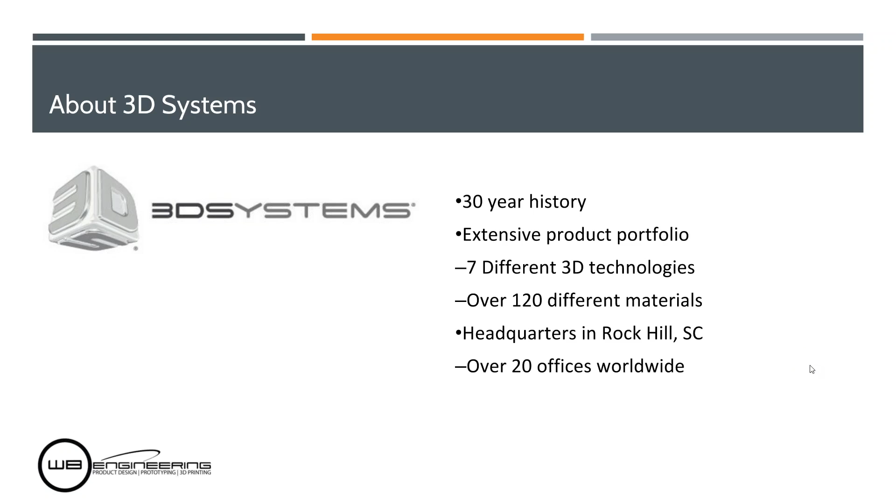So we're going to look into right now where 3D printing is currently being used. Across the board, 3D printing has been used in a lot of different industries - industrial products, one of the biggest markets, consumer products, automotive, medical, aerospace, academics, government, and then we have a small percentage for others and architecture.

So 3D printing is starting to become a standard tool for companies, specifically in the industrial products and consumer product realm. It's also starting to become a standardized tool in automotive, medical, and aerospace. 3D printing is now getting to the point where if you're not currently using it and you're in one of these key markets, you could start falling behind the curve.

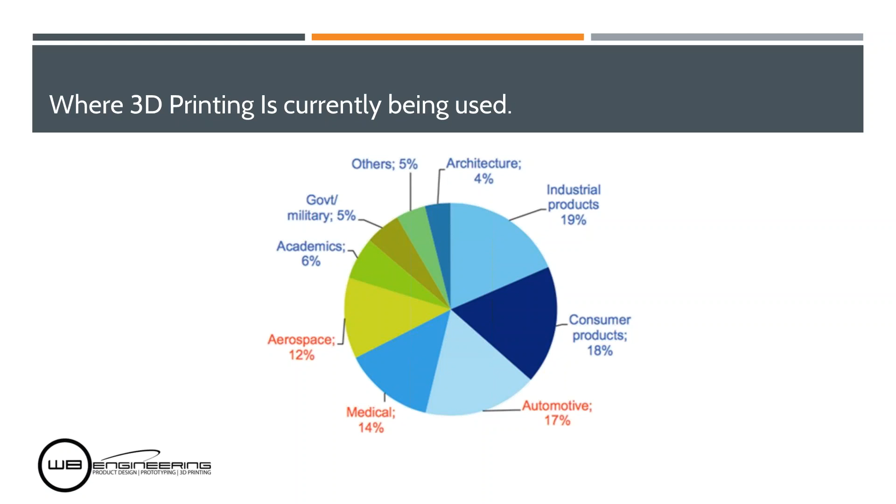We have customers in all different industries, and we have noticed that the market leaders do actively employ 3D printing as a part of their regular day-to-day activity. We've also noticed, as a partner of 3D Systems, a big increase in interest in terms of budgeting and actually implementing 3D printing over the last 3 years or so.

Okay, so let's go into some specific examples of 3D printing. One of the biggest areas where we've seen a huge boom in 3D printing is aerospace and also engineering optimization. Why? Because currently 3D printing is something that you can use to create really complex, optimized geometry without adding cost to your design.

This is a good example - it's a company called Frustum Inc. They actually did a direct metal printed part that was able to cut 70% of the weight of the original product while maintaining the same mechanical strength.

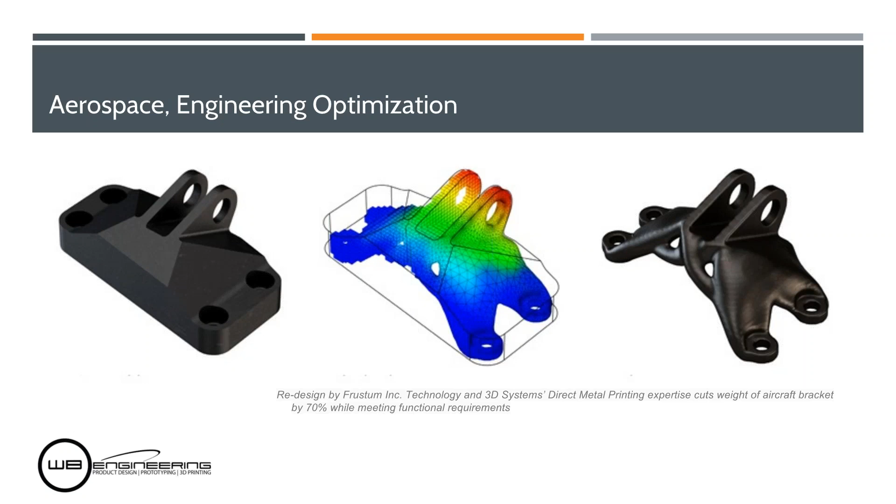In aerospace, this is a very important factor: being able to get a part that is just as functional but reduces weight by 70%. I was at a client's place a few weeks ago, and this is exactly what they were looking at 3D printing for. They designed something that has to carry a certain payload, which they lease or sell to their customers. So if their device is a quarter of the weight, that means they have that extra weight to sell to the customer. That's one of the big markets.

The other market is medical devices. This is an example of someone at Microdent, the founder of the company. He says even several years ago, metal 3D printing was good in terms of productivity, quality, and economics. He's pointing toward the future, saying this is something that is going to be a must in medical devices.

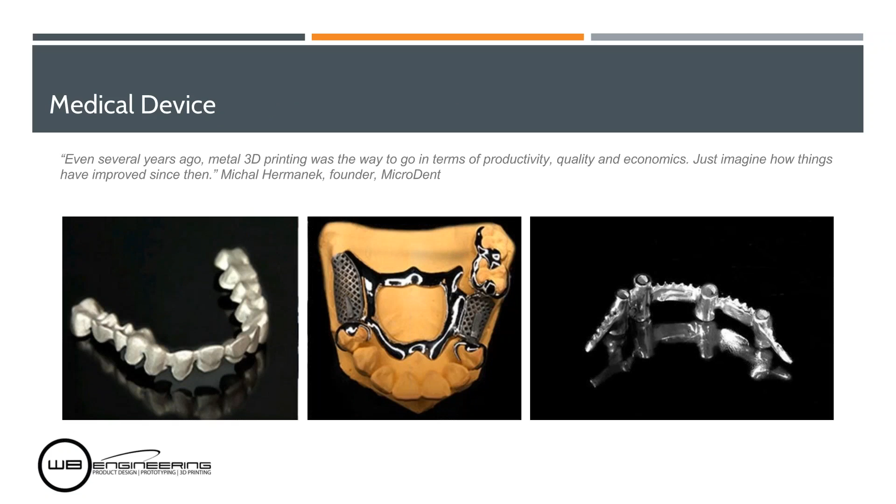We have a couple other medical device examples here, one using our ProJet 3500, now the ProJet 3600. They were able to produce very small, intricate geometries with the tight tolerances they require. If you've seen 3D printing before, you might have seen entry-level, consumer-level printing. Once you get into professional-level printing, you can accomplish very tight tolerances, and work with geometries that used to be extremely difficult to produce, particularly in prototyping.

There's another company here, Gyrus ACMI. They were able to cut their lead time in less than half using 3D printing for a plasma knife that they developed.

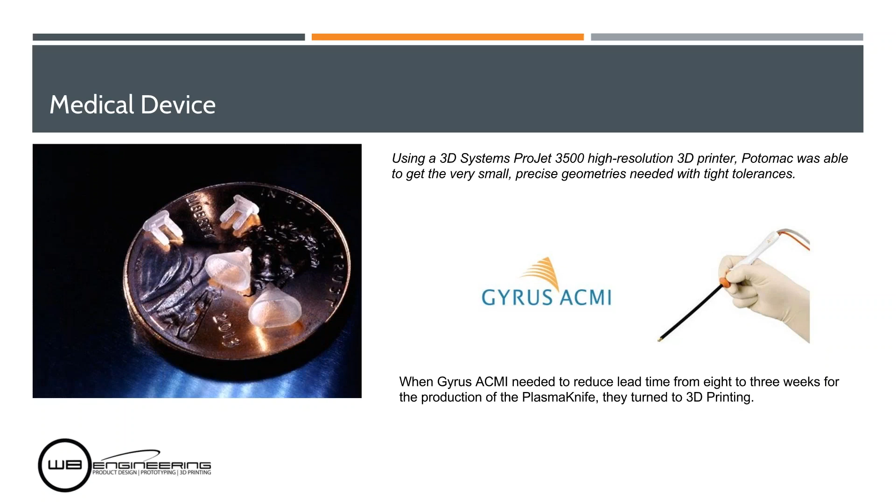In fashion and jewelry, this is another huge application for 3D printing. Today, per one of our customers, it's in the realm of possibility that they can receive a print or a file of a piece of jewelry one day, print it that same day, ship or cast it the next day, and deliver within 72 hours. This wasn't possible before. The other beauty is that you can submit multiple parts to the same print, so overnight you can have a full assembly of complex jewelry printed and then cast.

This doesn't just apply to jewelry. You can do this with other small, complex parts that you want to print and then cast, up to medium-sized parts as well. Our printers have cast-friendly material, so if you're in the casting business, you can use this for complex metal devices.

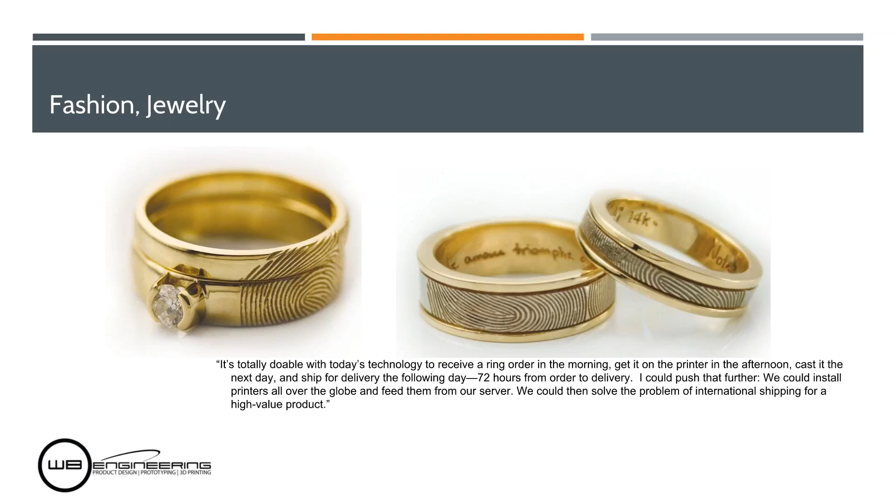Another point is functional prototypes. This is one of the more obvious applications of 3D printing: you're able to produce functional prototypes, iterate, and optimize very quickly. You can explore different geometries prior to production without investing significant money and time into expensive molds.

Internally, we have a lot of experience with this kind of application—that's what we do day in, day out. The best part is we're able to make mistakes in-house, then reiterate, optimize, and print again in the time it takes an average company to find their first error. We can go through many iterations over and over from one day to the next, in the same time it takes someone else to get one prototype out.

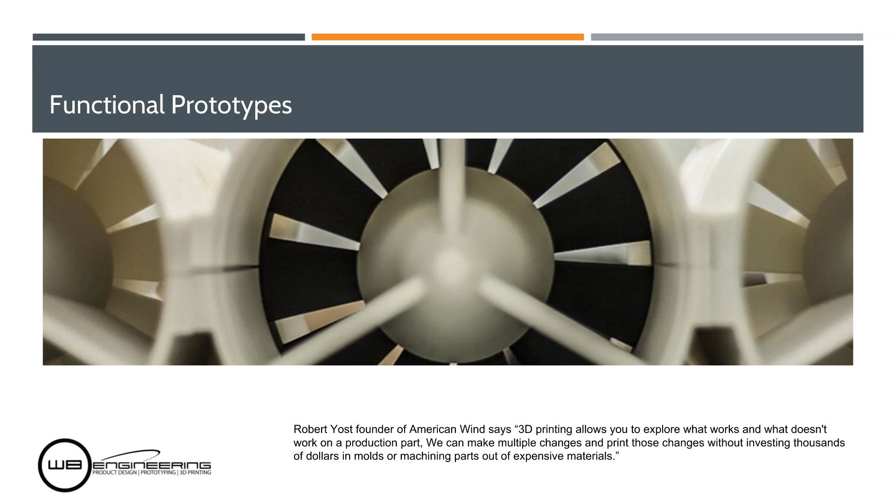For example, we'll have a design meeting in the morning and go over a couple different options our engineers have presented. That afternoon we submit them to the printer. The next morning we can all meet with actual physical prototypes in hand, and have a very educated debate over which design is optimal, which has the best features, and which will best meet our expectations. This kind of process is near impossible without having 3D printing in-house.

Not to mention, it also frees up the CNC machines for parts that need to be machined out of a specific material. So 3D printing isn't just brittle plastic parts—we also have 3D printers that produce production-quality parts, and we can output those to real functional applications.

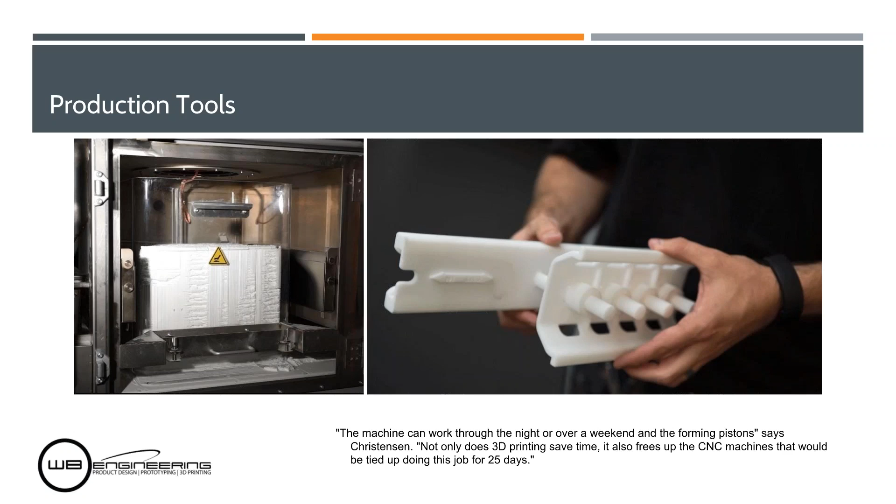The other example we wanted to show is that 3D printing is actually getting to the point where it can be implemented in mass production as well. A lot of times people think of 3D printing as the end part, but we like to point out that 3D printing can be part of the process, not necessarily the end part itself. We get a lot of kickback from customers saying their product is made out of a specific plastic or specific metal. Well, now you can think of 3D printing as part of your portfolio of tools to get you to the end point - an intermediary, let's call it.

In this example, this company actually produces injection molded parts, and they're able to get the same tolerances as they do off of a steel mold, producing the part in the exact material required for the application. You no longer have to worry about the nuances between a polypropylene-like or ABS-like material - you can inject the exact polypropylene or ABS you want and get your part. These molds also last for several cycles. There's an obvious difference from using a metal mold, and these do have their limitations, but you can get several cycles off a 3D printed plastic mold, helping you better understand your end product prior to cutting steel.

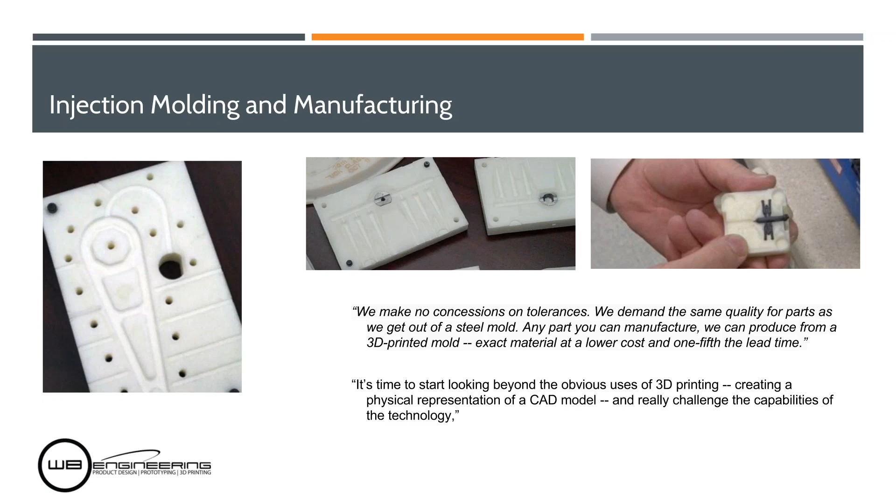The other one is jigs and fixtures. A lot of the times when you're producing parts, you actually need to produce parts to produce parts, if that makes sense. To CNC and machine certain parts, you need jigs and fixtures. So if you're going to make that end product, you're probably going to need some jigs and fixtures to get there. With 3D printing, you're able to 3D print those jigs and fixtures to get to your CNC part faster.

In this scenario, they needed to come up with custom clamps for picking up 300 different models. Prior to using 3D printing, they would have had to use milling, which takes a very long time. So you can use 3D printing again as an intermediary to the end product - in this scenario, jigs and fixtures. In the previous example, you can actually use it to make the mold.

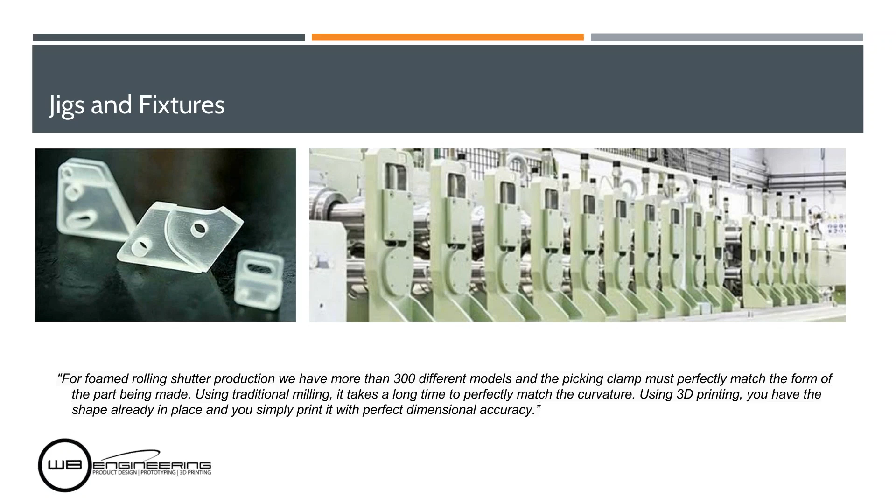This is a good example of consumer products - a company called American Precision Prototyping. They were tasked with creating something for FIFA, and had to do it in a very tight timeline. They had to redesign, prototype, get the prototype approved, cast, decorate, and ship 150 urethane bottle carriers for Powerade. They were able to do this entire job within 30 days using CAD and then SLA 3D printing - printing at scale, full size, making a urethane cast, decorating, and having it ready for the World Cup.

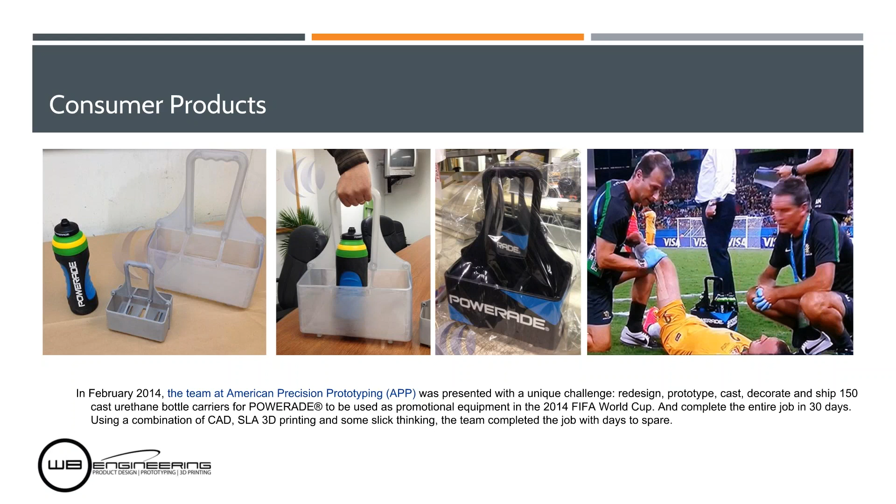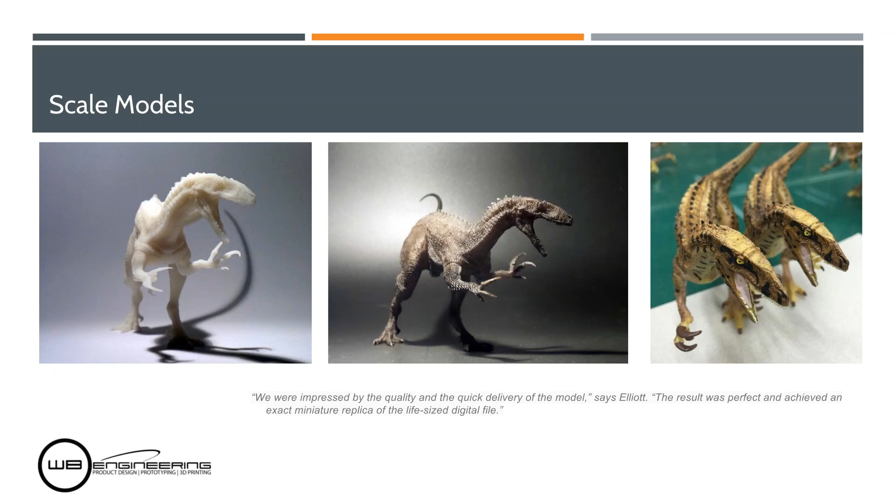Scale models - this is another one that we've seen a lot of progress with. This is an example off of one of our ProJet 3500s. In this scenario, they're able to make very impressive scale models of their designs in order to replicate certain types of geometries which are very impossible or very laborious to do without 3D printing.

Architectural scale models - this is one that is a pretty obvious application and is something that is starting to grow significantly. We all know back in 2008 the economy got pretty rough, so architectural applications did start to linger quite a bit, but currently things are starting to get back into place, and architecture is starting to pick up again, leveraging 3D printing to make very detailed scale models while reducing costs significantly and getting very fast turnaround times.

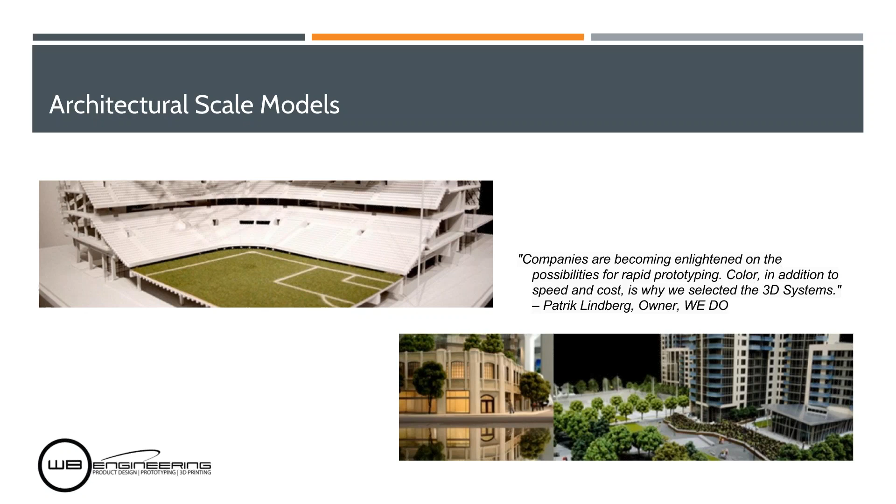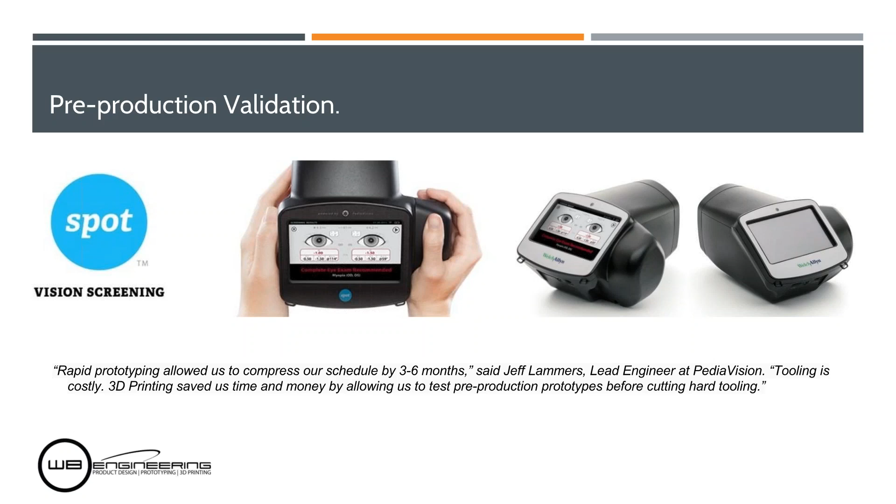This is another example, again very close to us as well - it's a pre-production validation. This company actually used rapid prototyping. In their scenario, they were able to compress their design cycle by 3 to 6 months. Also, they were able to make sure that their product was perfect before they actually went to production and cutting hard tools.

So I'll let Brad take over this slide so he can help explain some of the core benefits of 3D printing.

Thanks, Werner. So many of these, some of you may be familiar with, but overall 3D printing is opening up a world of possibilities, not just from the examples that Werner had alluded to earlier, but also it's helping companies to iterate quicker and more efficiently right in their office with 3D printers that are more and more office friendly and affordable, with some of the products that WB Engineering sells and 3D Systems manufactures.

So, faster time to market - we're helping to compress design cycles, making companies from multiple industries more competitive in their markets. This includes shortened design cycles, also the flexibility and convenience to prototype faster and more efficiently in your office. Once an engineer has an idea or multiple ideas, 3D printing is enabling them to bring these ideas to life quickly and affordably, and communicate some of these prototypes to other engineers so that they can then take these designs, or designs that seem more feasible than others, to market quicker.

It's also helping companies to make decisions quicker, so that if they want to change up a certain facet or shape of a specific design, they can do this quicker with 3D printing. But overall, I think the underlying theme is that 3D printing allows for more ideas and more breakthroughs, and the ability to make better quality, higher quality products. We also talked earlier about jigs and fixtures, and also improving manufacturing processes as well.

So now we're just curious a little bit about what people are going to be using 3D printing for. We did present a couple different case studies in different industries - it's always nice to see what people are using 3D printing for. Remember, we could use 3D printing for a wide range of applications. Day to day, we're actually noticing that our customers are teaching us more about all these intricate ways of being able to use 3D printing beyond just prototyping. One of the more interesting ones I've seen recently are in the casting industry, and also sales and marketing is actually taking advantage of this as well.